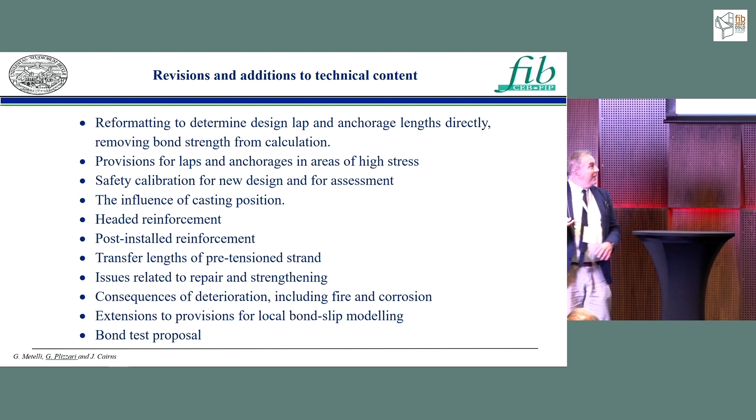It is supposed to move, I think. Down. No, down. Forward. Okay, good. Did it move? Okay, it moved. Thank you.

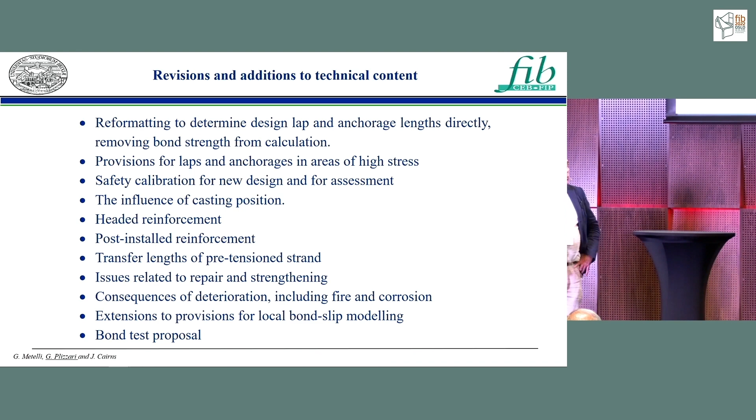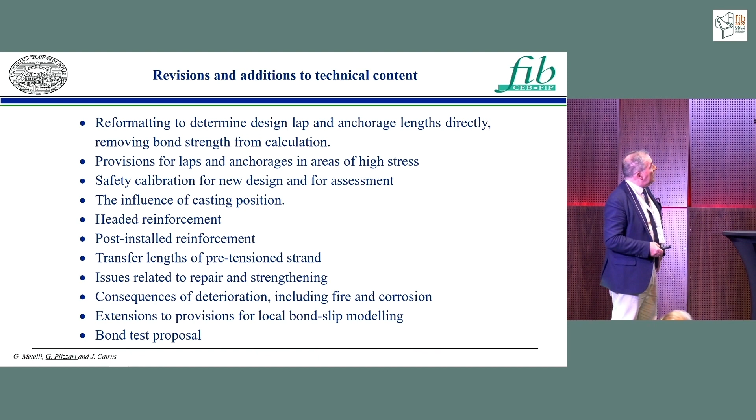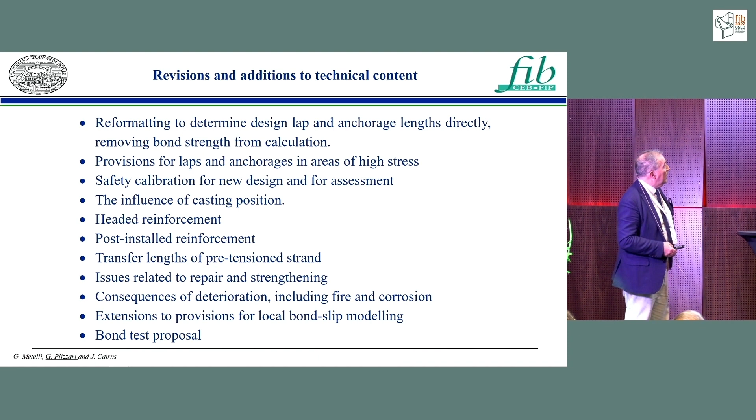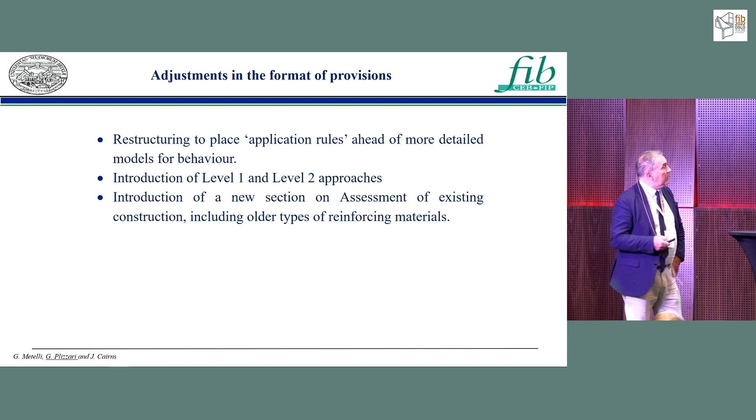There is a completely new organization of the chapter on bond with new items inside. We reformatted the document; it starts with provisions concerning anchorages and laps, then safety calibration according to the huge database we have. We went into the details of casting position. There is a new part concerning headed reinforcement, very important now for strengthening. There are new issues concerning transfer length in pre-stressing beams, repair and strengthening, consequences of deterioration including fire and corrosion, and extension for bond slip behavior, plus a proposal for a new bond test, for reasons I will explain. The chapter is completely reorganized with respect to Model Code 2010, and we try to introduce levels of approximation, with a new important chapter on assessment.

This slide shows a comparison between chapter 6.1 on bond in Model Code 2010, on the right, which started with local bond slip behavior. Now Model Code 2020 starts with design-oriented content, beginning with the design of anchorages and lap joints, then the assessment. We have an important chapter on assessment, another on repairing, and then at the end, instead of the beginning, we have the local bond behavior, which is important for research and special applications, but not for everyday design. Since new materials are coming into structural design, as we saw this morning, we need to make sure the rules we provide work well for these new materials.

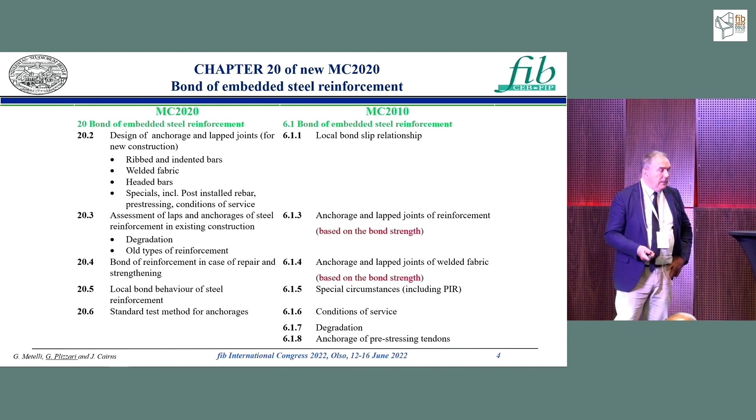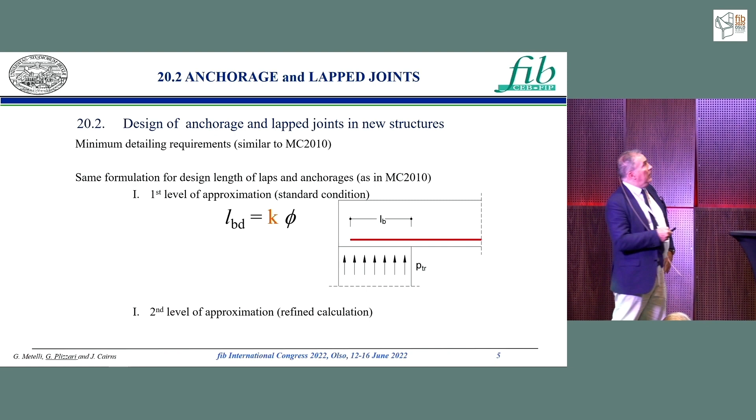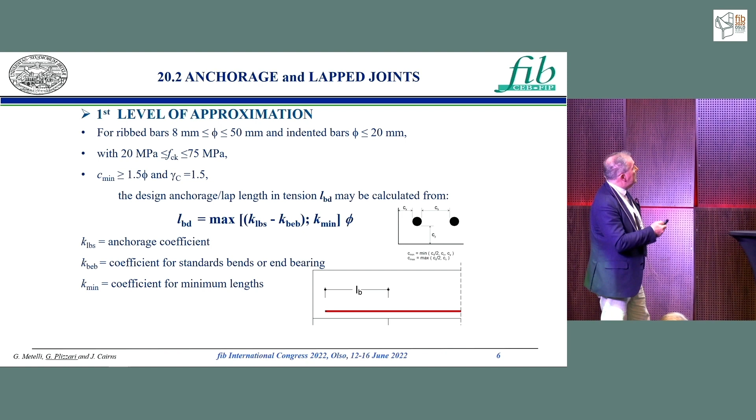Very quickly, because time is short, for regular design of anchorages and splices we have K times the diameter for the first level of approximation, and then a second level of approximation. For the first level, the K parameter is given by a minimum value, the end bearing capacity, and the basic anchorage length. If you satisfy these boundaries, which is usually the case in practice, it's quite easy to determine the K values, given by a table with several factors for the basic anchorage length, concrete strength, and stress in the material, depending on good and poor bond conditions. In an easy way, you can determine how many times the bar diameter must be anchored or overlapped.

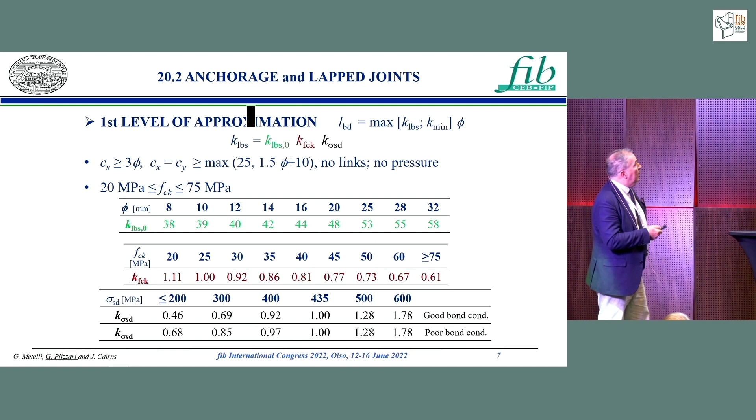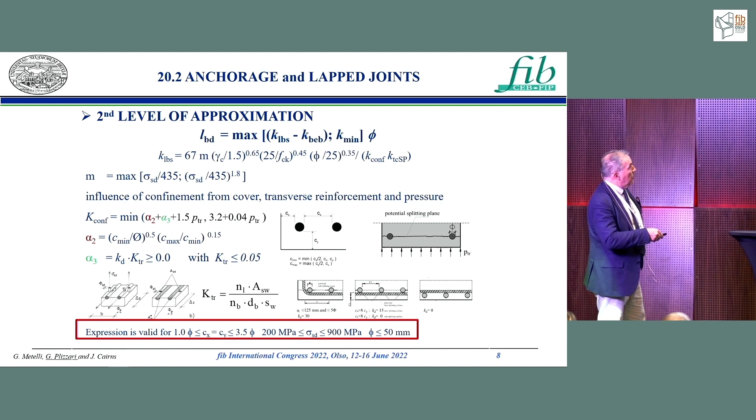These are the limits. Then you can move to a better level of approximation, level 2, if the first one is not enough. The equation is more or less similar, but you get a better determination of the K value based on a huge database from FIB and ACI worldwide, using a semi-empirical equation well explained in Bulletin 72 of FIB, with extensive probabilistic calculations, considering the stress in the bar, the confining actions provided by transverse pressure, by the cover, and by transverse reinforcement, depending on the position of the links and so on. These are the limits of approximation, given by the database we adopted.

Okay, these are more details because we did a lot of work also on the good and poor bond conditions, by considering that there's one behavior when you have a short anchorage, and another when you have a longer anchorage, because in that case you have bond stress redistribution. And that's why it also depends on the stress in the bar.

So there is basically an important revision of the good and bad bond conditions, especially for the parameter reducing or increasing the anchorage length in the poor bond conditions, because we are no longer referring to the bond strength, which is a conventional parameter but not realistic in practice. We go directly to the anchorage and the splice length.

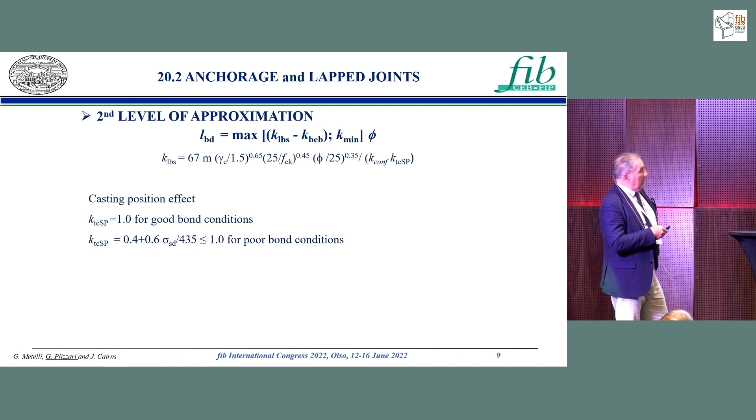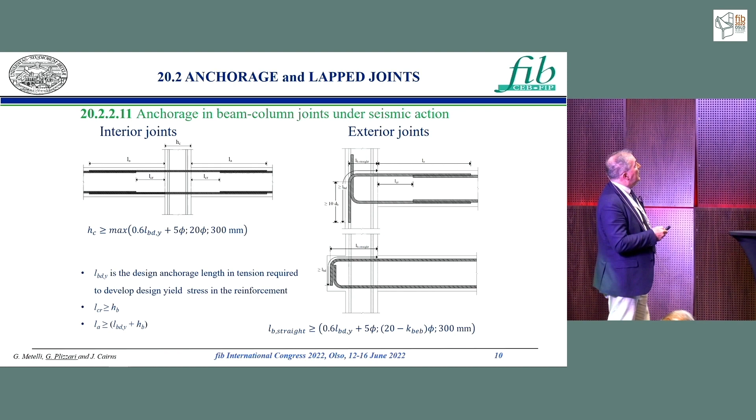We move now to some detailed prescriptions for joints in seismic regions, and I'll go quickly because there is no time. We also mentioned extreme thermal conditions in case of fire, where you have a degradation factor and also a load factor, considering the design load at limit states in case of fire.

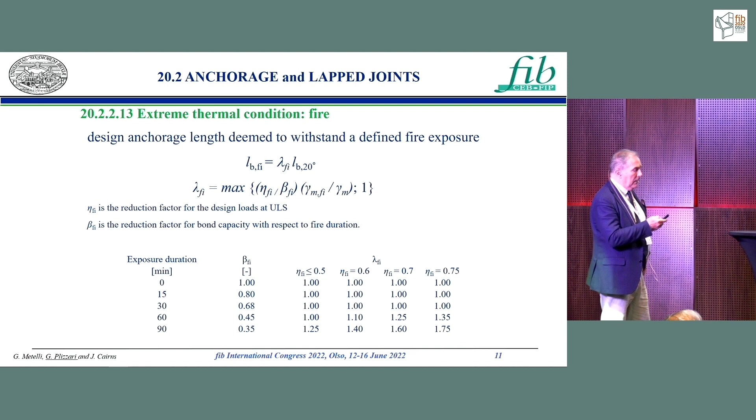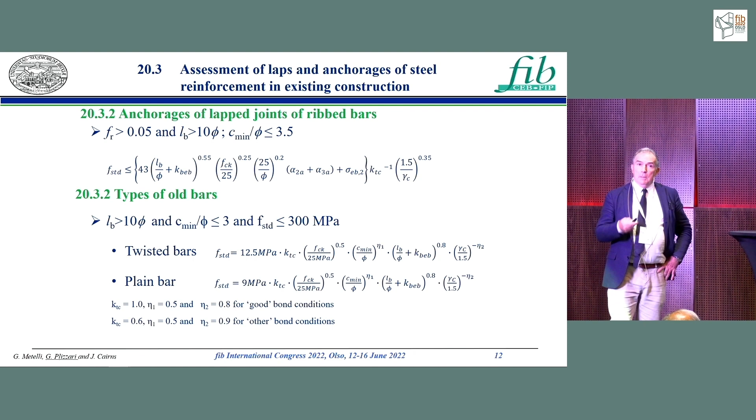We have the assessment chapter as well, because it refers to bond of bars in existing structures, and very often we have plain bars or twisted bars. By using the database available internationally, we were able to propose some equations to better evaluate what we are trying to provide in case of existing structures, the maximum stress you can apply to the bar existing in the structure.

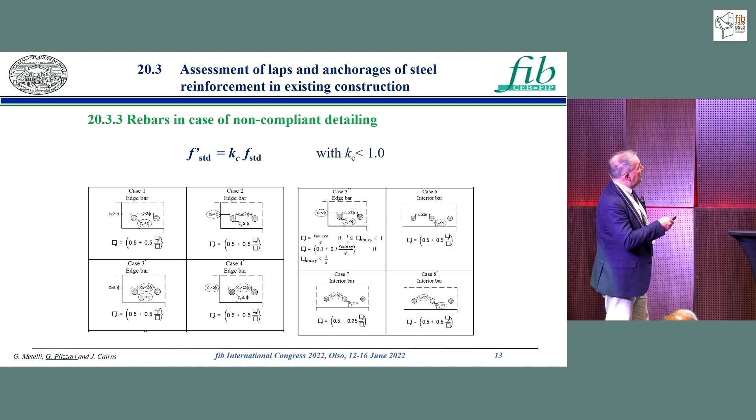Then we have the case of bonding, because the codes change, as Joost Walraven was mentioning this morning, in not compliant detailing, especially concerning the concrete cover. In that case, we have a reduction factor, which is generally lower than 1, depending on the conditions.

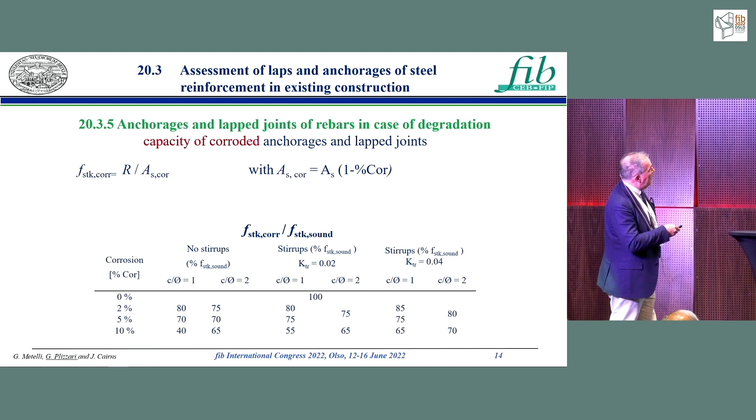Then we have the case of corroded rebars, and even here there is an improvement with respect to Model Code 2010, because depending on the corrosion level, which is referred to the distributed corrosion with a weight loss, and depending on the case of beams without stirrups or with a certain percentage of stirrups with different concrete covers, we propose a reduction of the maximum stress applicable to the bar if you have corrosion in the rebars.

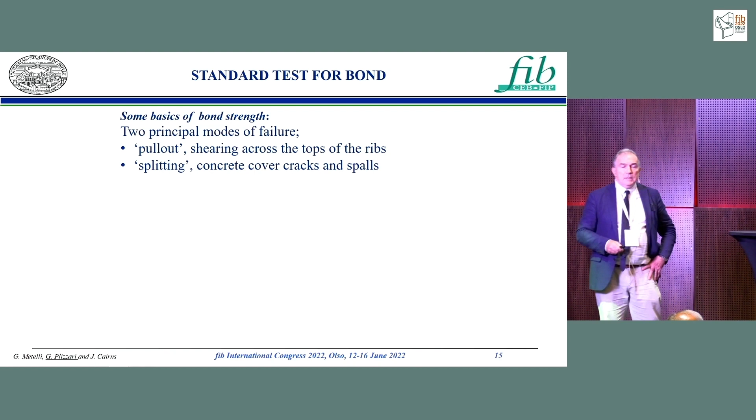Okay, last but not least, since new materials are coming into the market, I'm referring to, for example, as Marco was presenting before, fiber reinforced concrete, but also concrete with recycled aggregates, as was presented before. You cannot assume that even if the concrete strength is the same, the bond behavior is also the same.

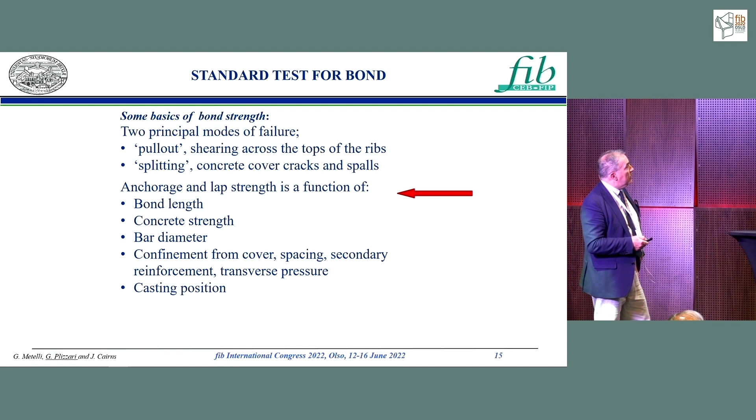That's why we are proposing a bond test for checking the validity of the equations we provide, based on regular concrete with regular aggregates.

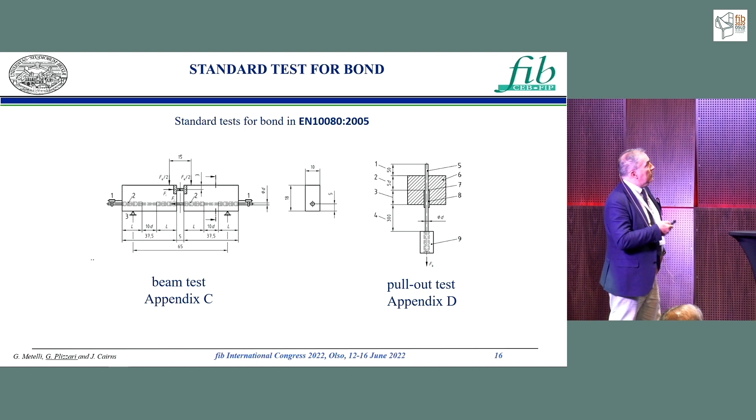The existing bond tests are the well-known beam test, which is quite heavy and very expensive to perform, and also not too realistic because you have a lot of transverse reinforcement for avoiding shear failure. Or there's the very simple pull-out test, but this is not representative of practice because you don't have the bar in tension and the concrete in compression at the crack. So there are several drawbacks for these two types of tests.

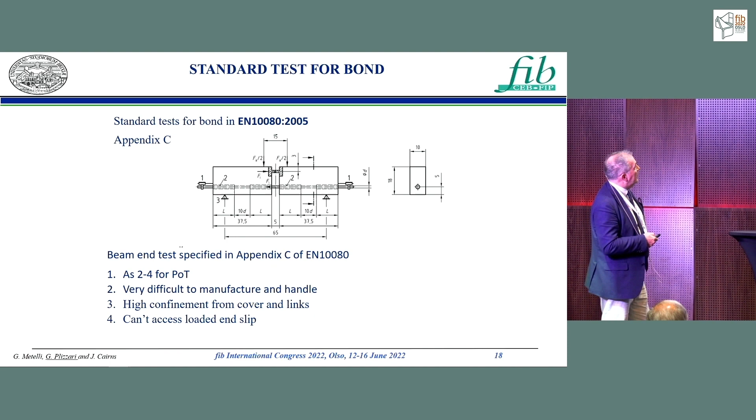I won't go into the details, but you can see here the drawbacks. So the idea is to propose a bond test for checking the validity of the proposed equations, but also for proposing new equations.

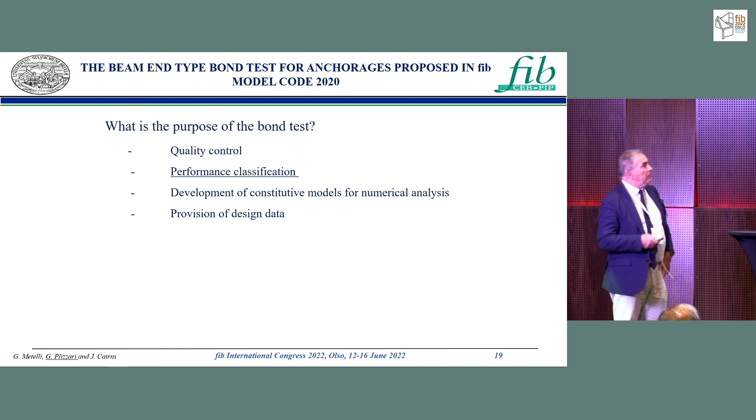For example, if you want to take advantage of the better confinement provided by fiber reinforced concrete, you can do a campaign of tests for demonstrating that a shorter anchorage length can be enough.

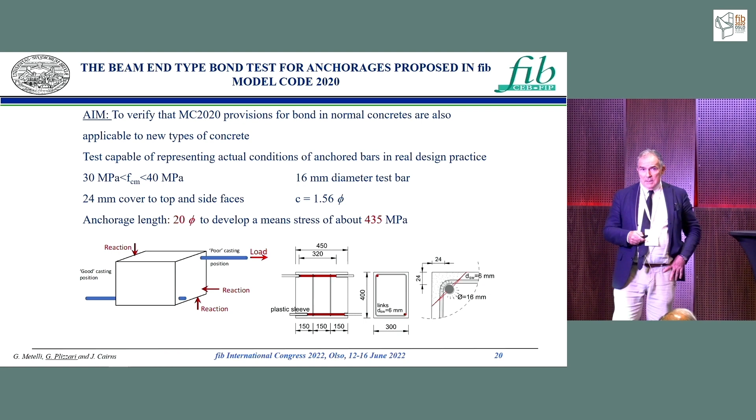Okay, and basically it's a beam-end test with two rebars, one in poor casting position and the other in good casting position. We have the reaction—you apply the load here, and you have the reaction here. It simulates a beam under bending, and you can make the specimen as long as you want in order to reproduce the anchorage length you need.

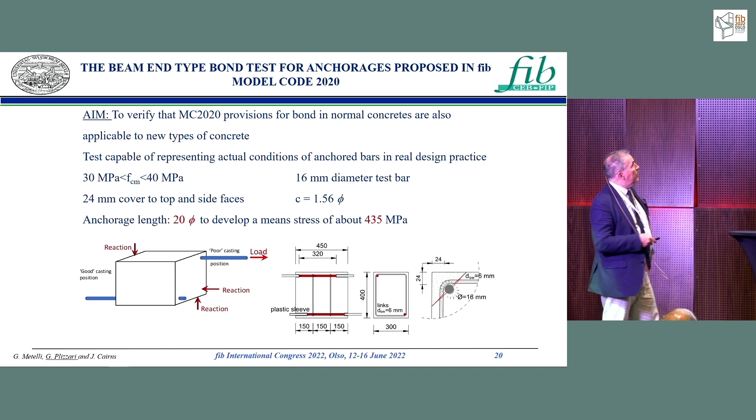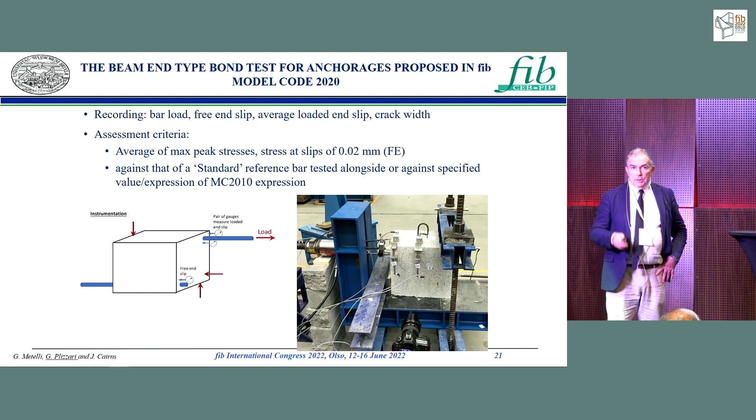And okay, this is what we are proposing. You see here a picture of the experimental setup of a specimen ready to be tested. Basically, the idea is to check, if you are using a new material, with a minimum of 6 specimens, whether the rules you are using according to chapter 20 are still valid for this new material you are planning to use.